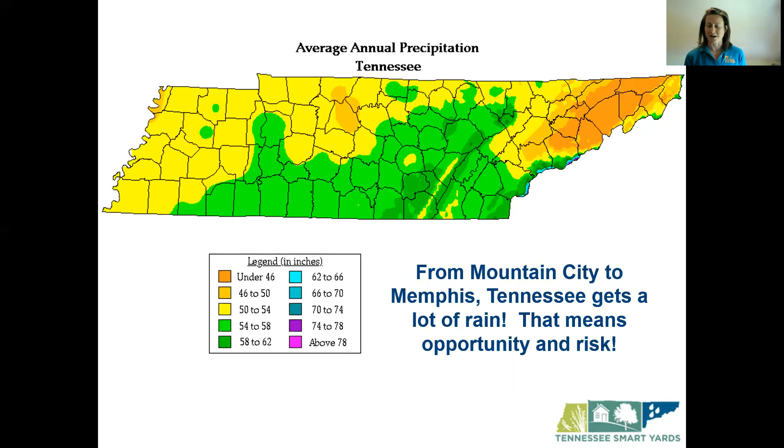So this means that there's a lot of opportunity for us to utilize that rainfall in our landscape. But there's also a lot of opportunity for challenges and risks associated to a lot of water in the landscape. And partner all this water falling from the sky with land use changes, and we have a recipe for some of those challenges being seen throughout the landscape.

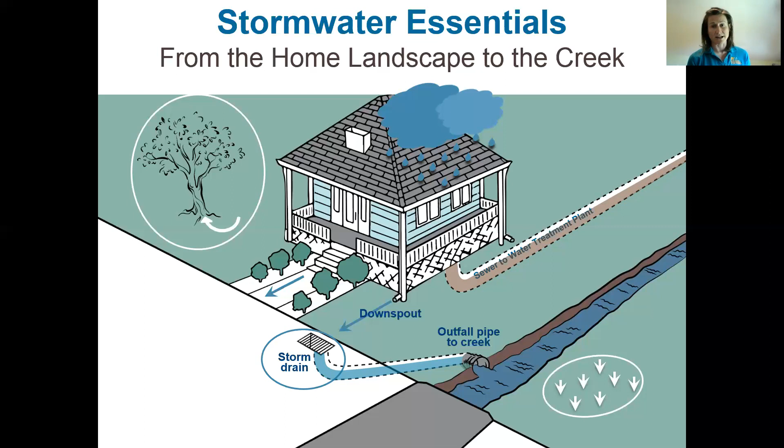So water that drains from the landscape from these impervious surfaces and makes its way into our storm drainage infrastructure, it is actually directly connected to our local waterways, our creeks, our streams, our rivers, and our reservoirs. So instead of going through a wastewater treatment plant like our sanitary sewer does, this storm sewer infrastructure is actually connected directly to our local waterways, like this creek.

This means that there's a lot of potential for substances and pollutants to get into that storm drain system and make its way into our waterways. And some common stormwater pollutants that we would see in our home landscape include sediment and eroded soil. So if we have bare spots in our yards, water that carries a lot of velocity can actually detach that soil and carry it in stormwater runoff, so producing erosion and carrying it into the storm drain system.

Also, any trash or debris that's stockpiled in that drainage way has the potential to be carried off. Chemicals like fertilizers or herbicides and pesticides, anything, again, that's kind of in that pathway when it rains has the potential to be picked up and transported with that runoff.

And even something as simple as washing our car. Our driveways are often connected and downhill from our roadways, and that roadway acts as a collection system for that storm drain system. So any of the soaps and cleansers and chemicals that we use on our cars, and anything that's getting washed off of our cars, again, has that potential to be washed into the storm drain.

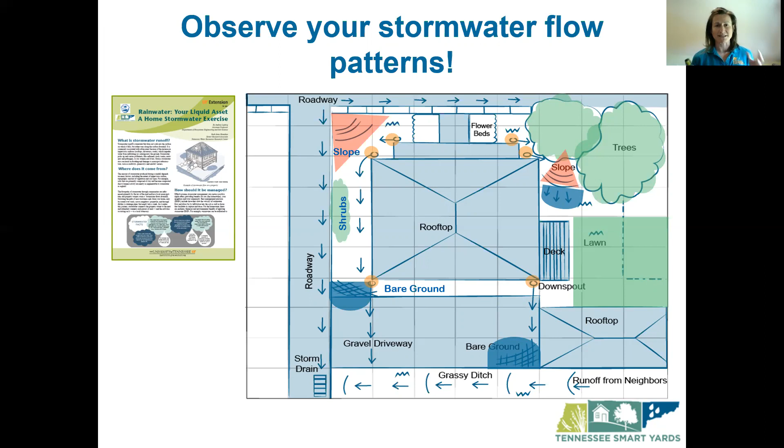And we're looking for things like our downspouts. Do they go subsurface, and if so, where are they daylighted? Do they connect to a local drainage way? Do they pop up in the middle of your yard? Also looking for things like bare soils. Where do we have the potential for erosion to continue to happen?

And the best time to see your property in action would be when it's raining. So grabbing your umbrella, getting outside. Oftentimes it's really hard to see the lie of the land or the topography that is influencing the way water is moving through your home landscape. So what better time to see it than when it's actively raining and you can actually see where water is ponding, where it's pooling, where it's flowing, and how it's connecting with any of the surrounding infrastructure.

So let's get to some of these actions towards a Tennessee Smart Yard. So here we have our 4 actions that help you get inches towards your Tennessee Smart Yard, carrying anywhere between values of 2 to 3 inches worth of actions.

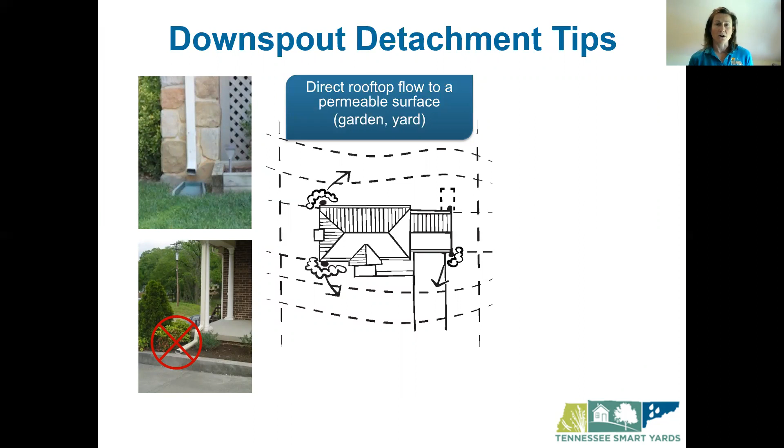And our first example is going to be simply disconnecting those downspouts from the stormwater system and directing them into a permeable area. So absorbing that rainfall runoff from your rooftop that's carried in your downspouts, trying to get your downspout to empty into a lawn area or a garden area instead of onto another hard surface. And this will allow that water to soak into the ground instead of accumulating and potentially transporting any pollutants downstream.

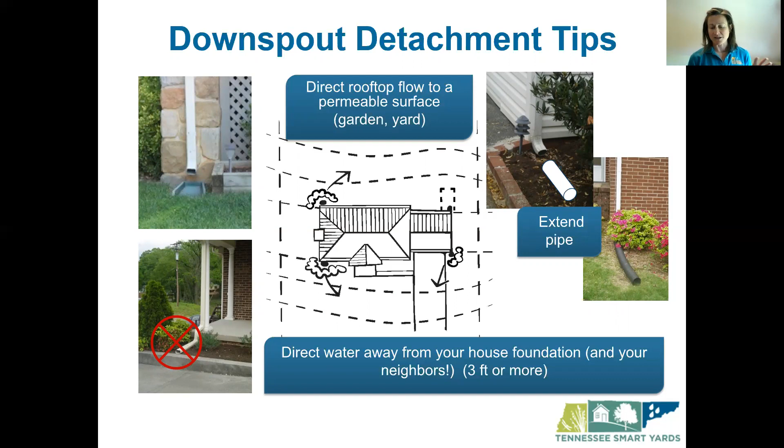Some things to keep in mind: using extensions on your downspouts to get that water at least 3 feet away from your home foundation, and making sure you're not directing it into any other infrastructure or your neighbor's infrastructure, and keeping it safely away from anything that could be harmed by this increased water flow.

Doing a quick perc test. So just downhill from where your downspout is going to be disconnected, in that area, digging a shallow hole, filling it a few times, and just making sure that that water is indeed going to be able to percolate into the soil will help fight against any nuisance ponding that might happen.

And then perhaps hiding that downspout, planting some more plants in that area just to kind of camouflage it, so that you don't have any downspout extensions that are poking out or causing any aesthetic issue for you.

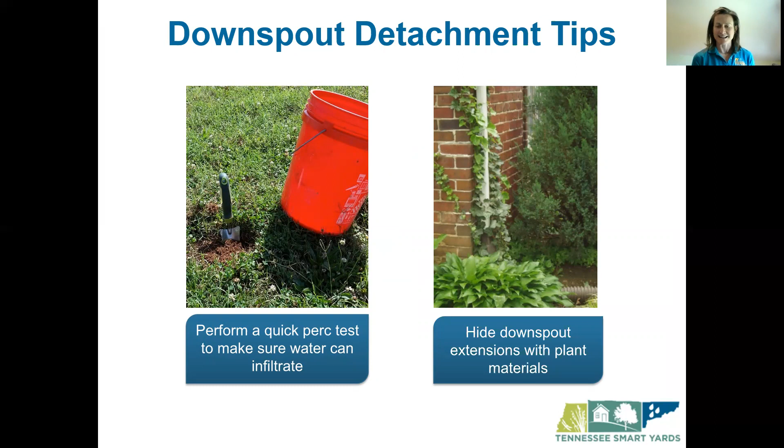And then where does it go after that? So thinking about replacing impermeable surfaces like this concrete drainage path with something that's permeable. So that concrete obviously doesn't allow the water, once it's collected in that drainage path, to infiltrate. It just carries it downstream. If we replace that concrete with something like grass or a permeable surface, then that water is allowed to soak into the soil, nurturing our turf grass here.

So here we're working in a pretty low slope environment, and the potential for erosion is pretty low, especially if we can have this established, nice, lush turf coverage right here. So replacing impermeable surfaces with something more permeable like vegetation there, decreasing runoff and increasing our infiltration.

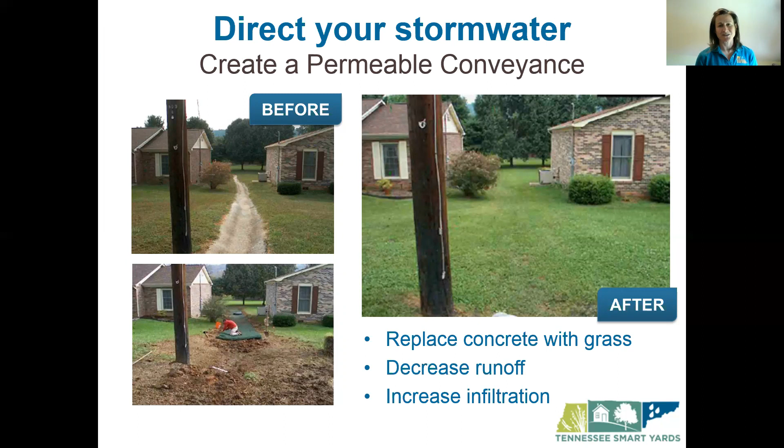And then utilizing swales in your landscape. So cutting off any sheet flow that might be coming off of your landscape, off of your house pad, intercepting that with a very shallow depression in the landscape with a berm on the other side, kind of capturing it and guiding it safely to perhaps a rain garden. But this allows you to, again, kind of keep that water on your property and use it to nurture a planted garden bed or your turf grass as well.

So getting to rain gardens, that is our next action here. So building a rain garden to catch that stormwater runoff and infiltrate it into the ground will get you 3 inches of actions towards a Tennessee Smart Yard. And so what's a rain garden? A rain garden is simply a planted depression in the landscape that is designed and placed in an area that can capture and infiltrate your runoff.

So here we've got an example from our very own West Tennessee Research and Education Center at the UT Gardens there in Jackson. And you can see that this rain garden, newly planted in this picture, is taking runoff from a couple downspouts from that plantation house on the property there, as well as a significant part of the driveway runoff as well.

So some quick steps to build a rain garden. First, you'll want to identify where exactly a rain garden would work for you in your landscape and be able to capture that runoff. So placing it in a place that can actually intercept the runoff before it gets into the storm drain system or onto the roadway. Doing some soil testing, so making sure that we've got soils that will be able to infiltrate that water that's going to be ponded in your rain garden, a very shallow pond.

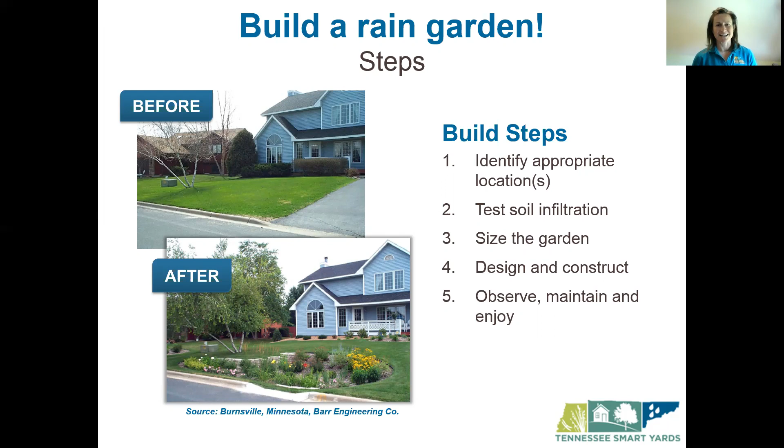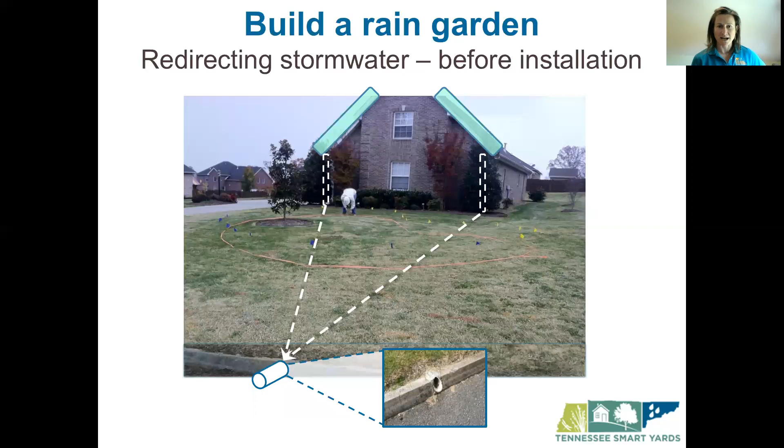So just some practical examples here. This is an example from Knoxville, redirecting this stormwater runoff from these two downspouts on the front side of this house into the space that we've delineated with the flagging tape. And previously, these downspouts went into the subsurface and were actually connected with a road drain. You can see that in the picture there.

And so we wanted to disconnect those downspouts, guide them into the rain garden, and in this situation the homeowner wanted to continue to have a mown area around the rain garden, so they actually used subsurface pipe and little pop-ups to allow that water to pop up into the middle of the rain garden in that depression, nurturing those native plants planted in the rain garden.

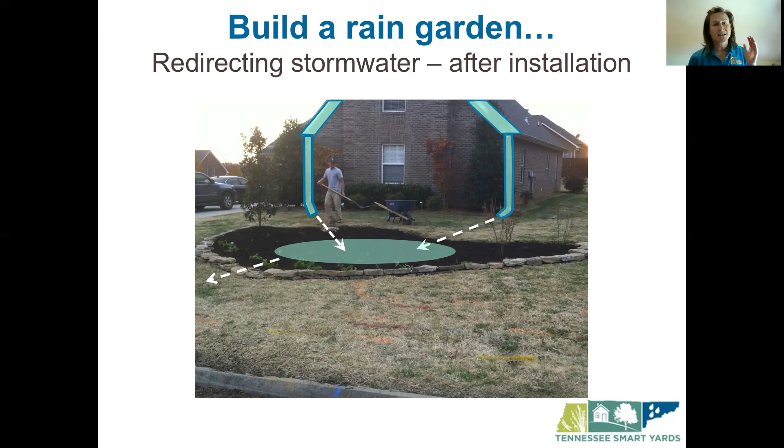And then it'll just take about 1 inch of rainfall for a rain garden to be filled, and then over 1 inch of rainfall, that overflow, that excess, would need to find that overflow there, in this example made out of the flagstone, and be directed safely back into the storm drain system. And here's some more pictures of a rain garden at work.

Again, so these systems are going to capture about 1 inch of runoff from your space that drains to it. And then when it rains more than 1 inch and that rain garden is saturated, that overflow will need to safely make its way into that storm drain system as it was before. But if we can capture about 1 inch of rainfall, then believe it or not, we'll actually capture about 80% of that average annual rainfall in much of our state. So the majority of our rainfall actually falls in that 1 inch and lower rain events.

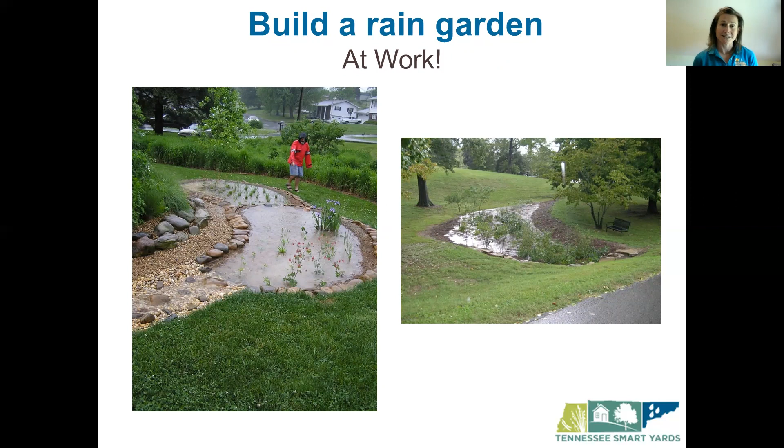So our next example of some practices to inch your way towards a Tennessee Smart Yard: using permeable surfaces for hardscapes, such as driveways, walkways, and patios, because of course we still need these in our landscape, we need them at our homes, but how can we make them more permeable in nature to accept that water when it rains, instead of having impermeable surfaces.

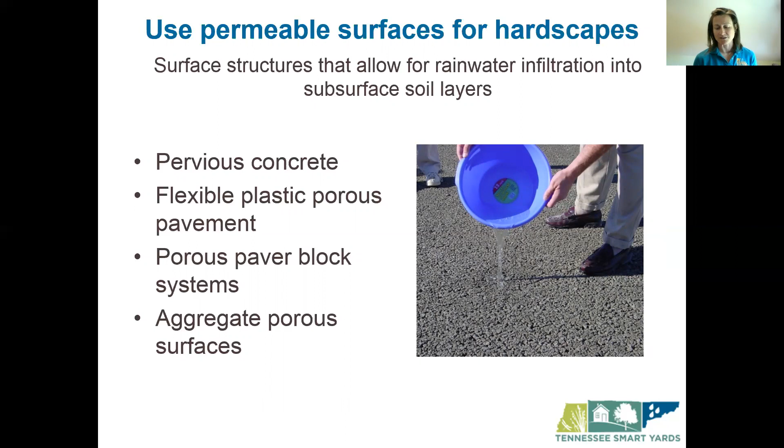So some examples of surfaces that will absorb water instead of create runoff are pervious concrete, plastic porous pavement, porous interlocking paver block systems, and then of course just your standard gravel, aggregate porous surfaces. So all of these are permeable examples of how you might replace these hard surfaces with something that will infiltrate water instead of shed it.

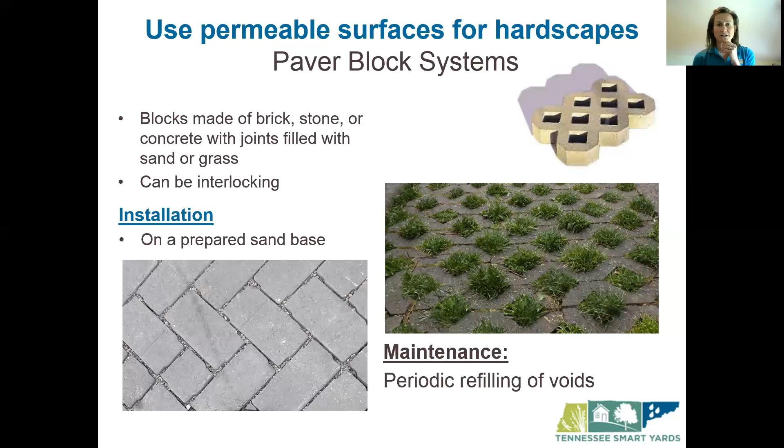So some maintenance tips on this. Sometimes you will have some need to go out and refill some of those spaces in between the interlocking pavers with more pea gravel, or reseed over if you are using a turf application. And then, like I said, your just basic gravel driveway can capture and absorb a lot of rainfall as it falls on it versus a concrete paved driveway.

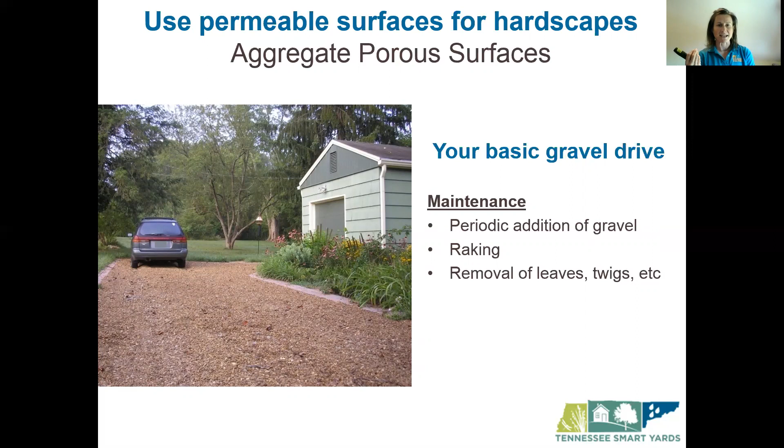So thinking about using pea gravel or other aggregates that creates that porous surface, some maintenance considerations, again, would be some periodic additions of gravel as it is washed away or moved during traffic, just raking out any furrows or trenches that might evolve over time, and just making sure that you frequently remove leaves, twigs, other detritus biomass that comes from the landscape, because that could build up and create drainage problems for you over a long period of time.

And so that brings us to our last action here, which is practicing good housekeeping. So we've talked about how we can absorb water into the landscape and choose more permeable options, but then also practicing good housekeeping to make sure that we don't have much opportunity for those pollutants in our home landscape to be transported into the storm drain system and make its way to those water bodies.

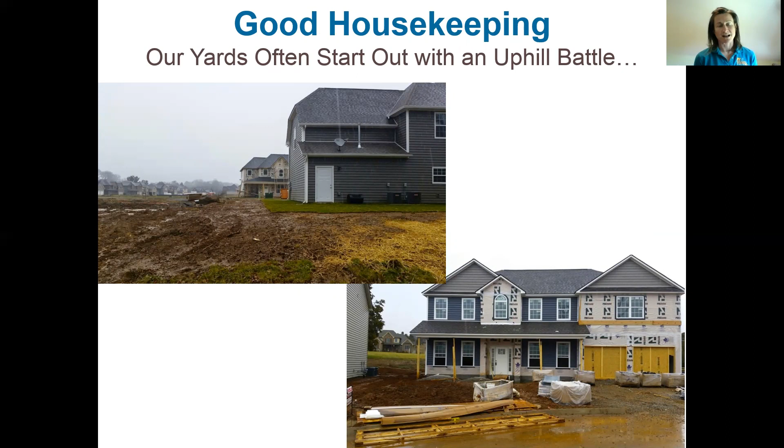So to kind of start this topic off, unfortunately, oftentimes our yards are starting off on the wrong foot and with an uphill battle, just because the amount of soil manipulation that occurs in the landscape often results in really highly compacted soils being left for us to deal with as homeowners. And of course, those compacted soils produce a lot of runoff, and so anything that we are putting out into the landscape, instead of being absorbed into the soil, if it's still compacted, is more likely to be carried off in runoff than with a porous topsoil.

So one of the best ways to practice good housekeeping is to ensure that any exposed soils, if we can get vegetation growing on them to reduce the impacts of rainfall on bare soils, to cover it, to get some roots growing down into that soil, helping create porosity so that we can create that sponge that we're trying to simulate in the landscape, to accept the water, get it into the soil profile, and then if we can get infiltration to happen, then that means our plants can actually have access to that water too.

So a lot of good things come from trying to increase vegetated cover anywhere possible, especially on our areas that are bare. And if we don't have vegetation or something protecting that soil surface, a lot of the times that exposed soil, just from the energy of rainfall, raindrop impact, and then any overland flow will scour and erode that soil, carrying it into our local waterways.

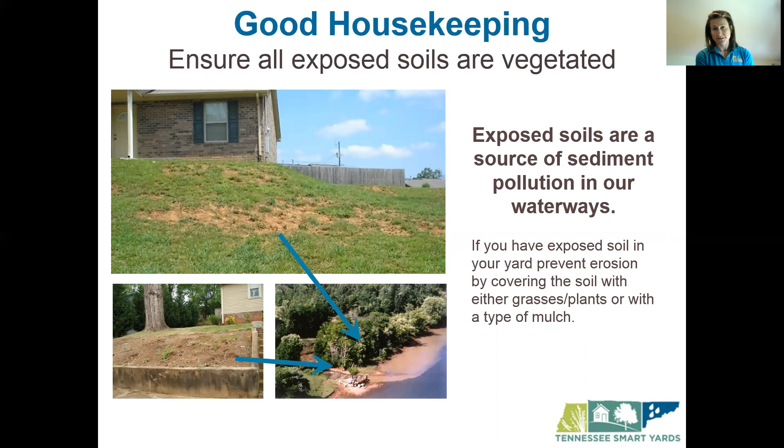Sweeping grass clippings, fertilizers, any sort of loose soil off of hard surfaces. Again, every time it rains, whatever is on top of these surfaces will be carried off with the velocity of that runoff, having the potential and the risk for those substances to make their way into the storm drain system, and in turn into our local creeks. So making sure that we're sweeping up after ourselves, not leaving any chemicals or other substances on those hard surfaces that could be transported during rainfall events.

And onto this last piece about washing your car. So consider washing your car on the lawn instead of in your driveway. Your soaps and your cleansers have different chemicals in them. So instead of washing your car on the hard surfaces where those soaps and cleansers and car grit could be washed into the storm drain, washing it on a permeable surface where that water can get into the soil, it can trap all of those substances in the soil and be remediated there naturally over time.

Oil, anything that's spilled from car maintenance activities, just making sure that you're using kitty litter or some other sorptive substance to try to get that off of the surface so that it's not carried away in that rainfall event would be another way to practice good housekeeping.

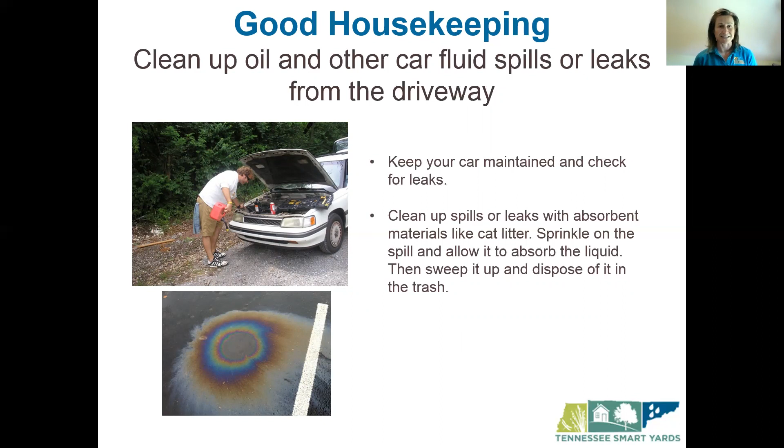And then finally, scooping the poop. So picking up your pet waste in the landscape. Animal waste is a source of pathogens, and if it is carried away in stormwater runoff, it can make its way to our surface waters through the storm drain system. So making sure that we are scooping the poop, especially if it's on hard surfaces, and making sure of where we're stockpiling that and how we're discarding it, that we're not putting it in the flow path right at the end of a downspout or some other place where water could take that away and run off.

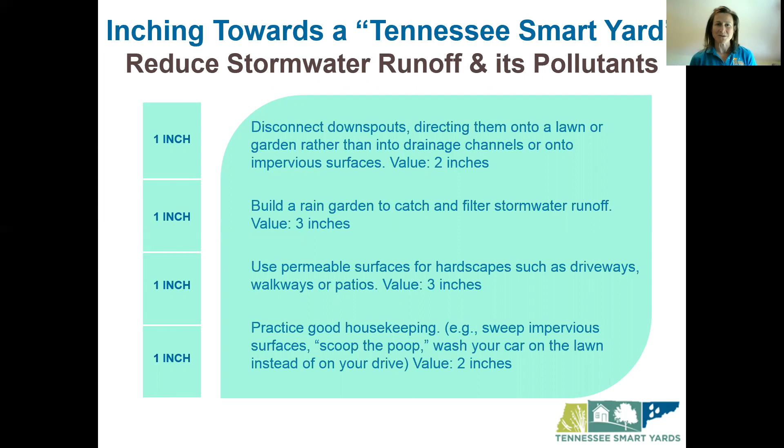So in summary, these are your actions for reducing stormwater runoff and pollutants in the landscape. And each of these actions will help you accumulate inches towards your Tennessee Smart Yard. Our yard quality is a direct result of our actions, and our stream quality is a direct result of the community's actions. We're all connected by water, and so the quality of that stream is impacted by each and every one of us and how we practice stewardship in our own landscapes. So this has been the module for reducing stormwater runoff and pollution in your home landscape, one of the 9 foundational principles towards a Tennessee Smart Yard.